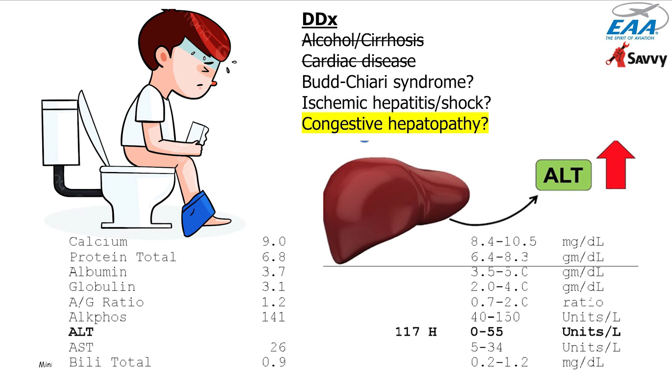And I started my presentation to the docs telling them that I had recently had a lesson in plumbing, and it happened to be my plumbing. I had a couple of nasty bouts of diarrhea, TMI I know, but I went to my primary care doc and said, "Hey, doc, this is sort of unusual for me. I wonder if we should follow up on it and see if we can figure out what's going on." She's a very good internist. She had me do some blood labs. One of the liver enzymes, ALT, was about twice what it should be. Not enough to really worry about, but in an abundance of caution and with my encouragement, because I'm a data-driven person, she gave me a prescription for an abdominal ultrasound.

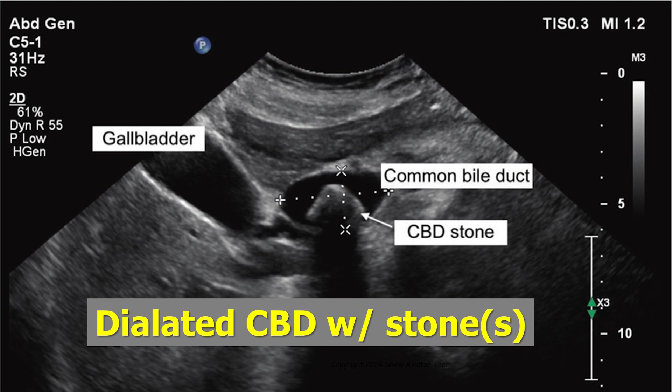When they did the abdominal ultrasound, the good news was that the liver was unremarkable and the pancreas was unremarkable. But they did notice that my common bile duct was dilated. It was larger than it should be, which frequently means that there's something stuck in there. They saw something that might be a gallstone that had migrated into the common bile duct and gotten stuck. So they recommended an MRI, and it was about a month and a half before I could get on the schedule. When I went in for the MRI, they saw very clearly two large gallstones lodged in my common bile duct, kind of blocking the path for the liver to put bile into my digestive system.

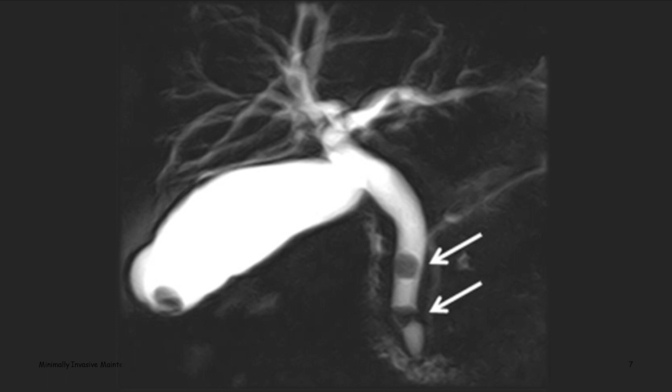I found this out on a Monday at an office visit with the gastroenterologist, and they said there's a procedure we would like to do, and we'd like to schedule you for the day after tomorrow. And I said, oh my God, is it that serious? And they said, no, it's not really that serious. It's just that there's only one guy in the county qualified to do this procedure, and he's just turned in his letter of resignation. He's going down to Santa Barbara at the end of the month. So unless you want to go to Santa Barbara, we need to get you on the schedule right away. So I agreed. I spent the next day Googling the procedure and learning all I could about it. The procedure is called an endoscopic retrograde cholangiopancreatography.

I'll say that, which is kind of a mouthful, so they always call it an ERCP. And it's basically a procedure where they stick a very specialized borescope in your mouth and down your esophagus and down through the stomach and work it through the pyloric valve at the bottom of the stomach and the top of the intestinal tract. And it's a side-facing borescope, so it's got a 90-degree viewing angle,

and they work it down until they find this little sphincter where the common bile duct, which is a duct that connects both the liver and the pancreas and the gallbladder all into the digestive system. So they find this thing, and this is not just a plain ordinary old endoscope or borescope. It has a channel in there where you can insert all sorts of tools. So it's not just something that's used for viewing.

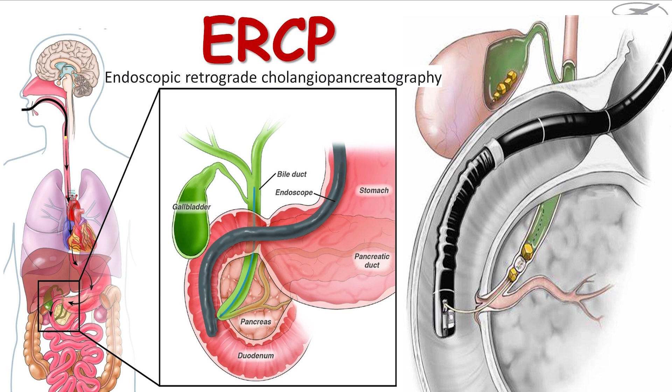It's something that can be used to do sort of surgical procedures, including removing these stones that were lodged in my common bile duct. So this endoscope has more tools than a Swiss Army knife. There's guide wires, there's probes, there's baskets and snares and inflatable balloons and all sorts of stuff that you can run down the channel of this scope and use to do things that would normally require surgical intervention.

I learned, by the way, the difference between an endoscope and a laparoscope, because I would have guessed that this would have been a laparoscopic procedure. A laparoscope is something that is inserted through a hole that the surgeon makes in you, and an endoscope is something that is inserted through a hole that God put there. It's called a natural orifice.

So this was an endoscope that went into a natural orifice and had all these neat tools, and the surgeon was able to remove both of those stones from the bile duct, and it was a somewhat complicated procedure, but it only took about 15 minutes. And I thought it was incredibly cool that they could do it that way, and that they were able to do this in such a minimally invasive fashion without cutting any holes in me.

Basically, I was there for a couple hours, went home, had a very slight sore throat because the stuff had been run down my throat, but the sore throat cleared up within a couple hours, and it was a very cool procedure. But even cooler is another thing that I haven't had done to me, but I learned about.

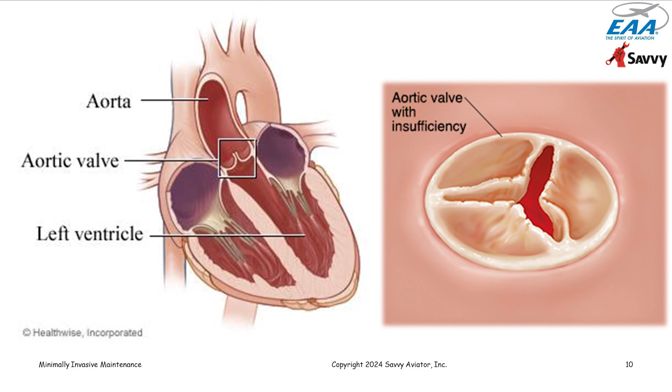This was an open heart procedure where they had to crack her chest, hook her up to a heart-lung machine, stop her heart, and go in there and do this big surgical intervention. Things don't get much more invasive than this procedure. This is worse than pulling a cylinder. It's pretty much like splitting the case.

And they put a porcine valve, a valve harvested from a pig's heart, in there, and sutured it in and put her all back together. She had a fairly long and painful recovery period, a couple months of recovery, but after she recovered from it, she was pretty much good as new and had very good heart function. So it was very successful, but it was also extremely invasive. Well, it turns out that nowadays they don't do it this way anymore, or very seldom do they do it this way.

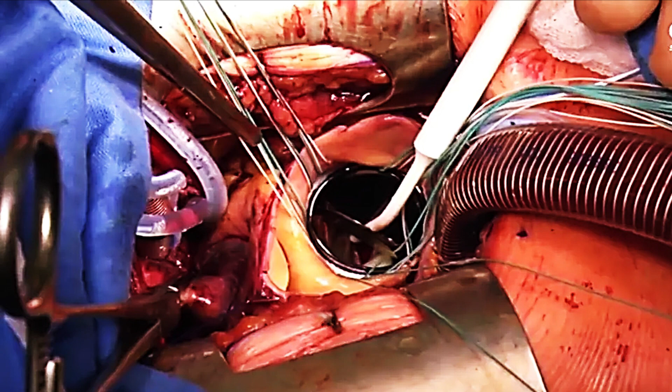Stenotic aortic valves are now replaced in a very non-invasive fashion, something called TAVR, transcatheter aortic valve replacement. This is a procedure that is so unbelievable to me. It's just absolutely remarkable.

Somebody invented an artificial aortic valve that can be folded up in such a tiny package that it can be inserted through an artery. Typically they go in through the femoral artery. They make a little hole near the groin area, and they run this thing up.

The procedure involves first running a balloon through the catheter and expanding the old bad valve so it's wide open, and then running this artificial valve, all folded up tiny, up through the artery, putting it in place, and inflating a balloon to expand it into place.

This artificial valve is sewn to a stent, which is expanded and grabs the side of the vessel and holds on. It's a little hard to do this when the heart is fully pumping, so they use some electrical stimulation to cause the heart to go into tachycardia, which makes it not pump very efficiently while they're doing this, but they don't stop the heart.

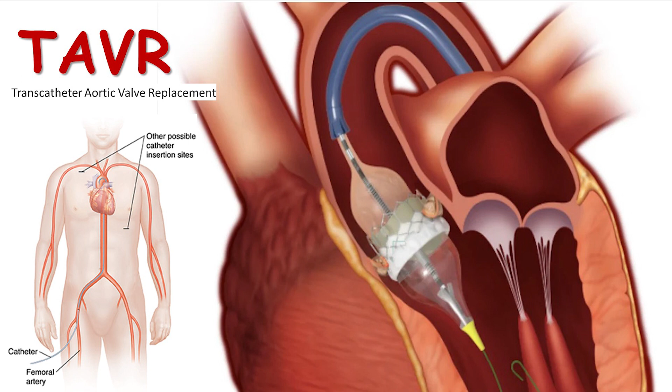This is done just through a tiny incision in the groin, and it's extremely non-invasive, and it's absolutely remarkable that they can do it that way. In fact, it's hard for me to imagine who it was that had such an outside the box thought that they thought, hey, maybe we could do it this way, because it just seems so outlandish that they're able to do it.

It was an experimental procedure for many years. Now it's pretty much the standard of care for aortic valve insufficiency, unless there's some other structural problem with the heart that needs to be repaired, some comorbidity. This is the way it's typically done now, and it's quick and easy, and the recovery is essentially zero. You're out of the hospital the next day, and it's just amazing.

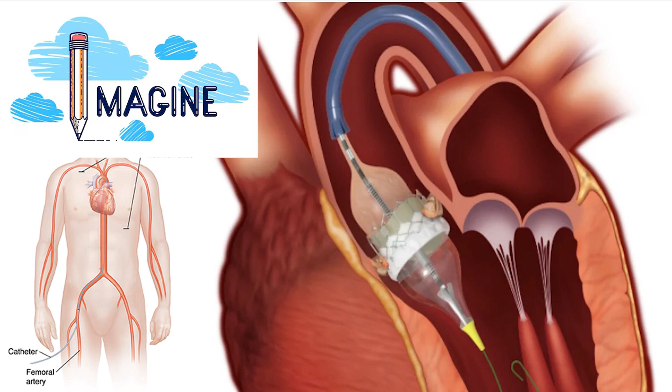So this got me thinking, well gee, if they can do this, what could we do when we're working on airplanes? I had this thought while I was in the shower one day about, well, wouldn't it be cool if we could replace exhaust valves this way? We come up with a procedure called retrograde transguide exhaust valve replacement, where an exhaust valve could fold up and be inserted from the outside of the cylinder and then expanded inside, and we wouldn't have to take the cylinder off to replace an exhaust valve.

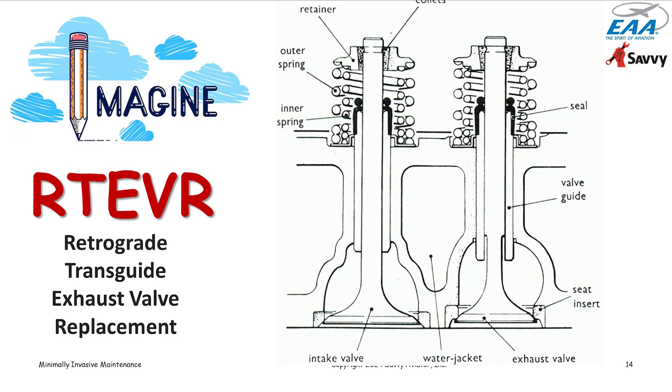Well, nobody's working on that as far as I know, but it was just an interesting thought. We're so far behind medicine in this area of being minimally invasive, but I think it's really important for mechanics to have a minimally invasive mindset and to try to use the least invasive possible methods to solve problems.

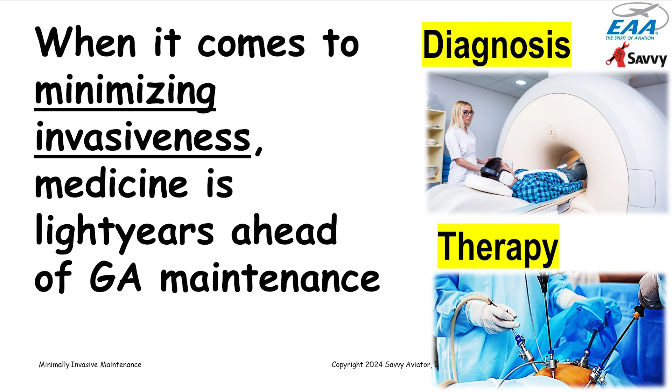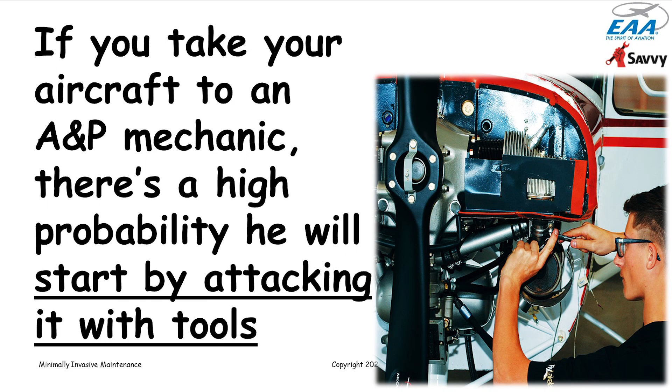And that's not typically the way mechanics are trained. If you take your airplane to an A&P mechanic, the chances are it won't be 5 minutes before he's attacking the aircraft with tools and taking stuff apart, because that's what mechanics do. There's the old expression, I think Maslow's expression, that if all you have is a hammer, everything looks like a nail.

What kind of tools do mechanics typically have? They have compression testers, and they have cylinder base wrenches and stuff, and they're just kind of trained to be in the business of taking stuff apart.

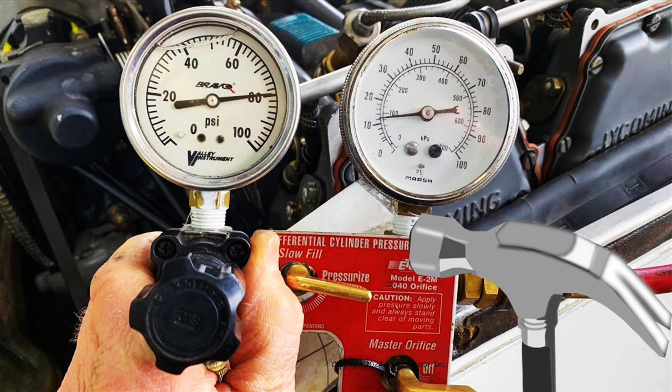How does your A&P assess cylinder health at the annual inspection? Well, 99% of the time he uses something like this, the differential compression tester. In fact, the way most mechanics were taught, and this is slowly changing, there was a kind of simple rule.

When you did an annual, you used the compression tester on all the cylinders, and any cylinder that was less than 60 over 80 needed to be removed for repair or replacement. If it was 60 over 80 or better, you could declare it airworthy and leave it there. And so there tends to be a lot of cylinder removal.

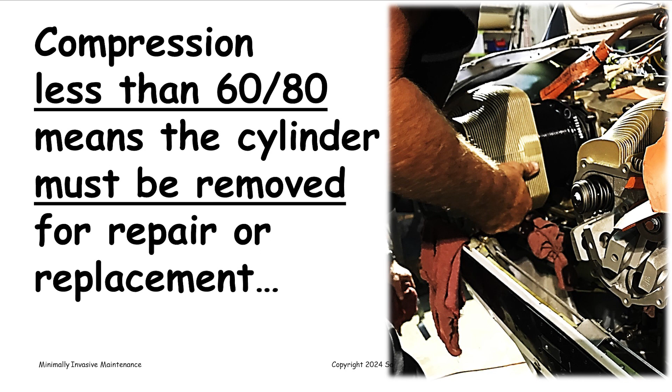Most mechanics aren't really aware of this because they aren't trained on it, but cylinder removal is very risky business. I've actually done a couple of webinars that are in the archive about why I don't like removing cylinders and all of the risks involved.

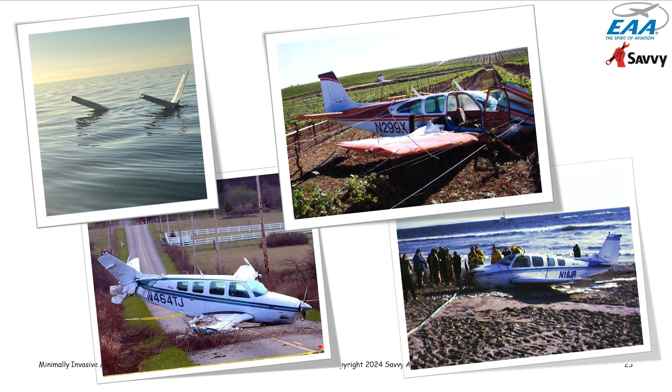I think I've had more exposure to this problem than most people, because I do air crash litigation expert witness work frequently as a defense expert, and I've been involved in just a lot of cases. These are 4 of them, where a mechanic did cylinder removal on an aircraft, and then shortly thereafter the aircraft had a catastrophic engine failure and crashed.

Sometimes, like the one on the bottom right, which happened in Santa Monica some years ago, 2 people died. The one on the upper right happened up near Salinas, California. It involved very serious injury to both occupants. One of the occupants had permanently impairing traumatic brain injury from this crash.

Sometimes the outcomes aren't that bad. The one on the lower left, everybody walked away with only a few scratches, and the one on the upper left, which happened most recently, only last year, the airplane had a catastrophic engine failure shortly after takeoff in Florida, the flight right after some cylinder work was done, and wound up going into the ocean.

Pilot did an excellent job at ditching. This was a Part 135 flight. Passengers in the back got out basically uninjured. The pilot had some minor injuries and spent a couple of days in the hospital, but sure could have been a lot worse.

But at any rate, I've been on a campaign for a long time to say, hey, we don't always need to remove cylinders to solve problems. But that's kind of the standard of care that mechanics have traditionally been taught.

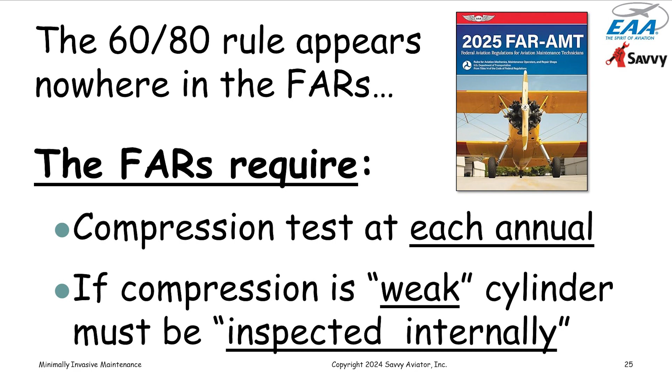But it doesn't define what weak means, and it doesn't define what inspected internally means. So some years ago, I asked the FAA lawyers to send a letter requesting an interpretation of whether you could satisfy the requirement to inspect internally a cylinder with weak compression by doing a borescope inspection rather than pulling the cylinder off. And the letter I got back said that yes, the borescope inspection would meet the regulatory requirement to inspect cylinders for improper internal condition and tolerances.

So that says you don't have to remove the cylinder to satisfy the internal inspection requirement. And that kind of leaves the question, well, what does weak compression mean? Because the reg doesn't say, it just uses the word weak compression. It doesn't define it anywhere. So if you look for guidance on what weak compression means, you can find it in various places, and they say various different things.

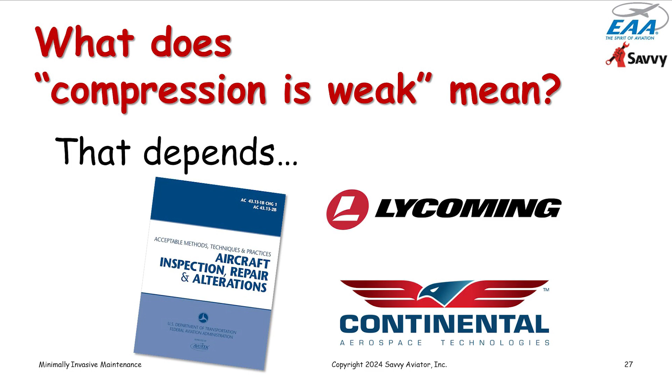It turns out that the old traditional 60/80 rule, the only place that I could find it written down that says under 60/80 the cylinder has to come off, is in Advisory Circular AC 43.13-1B, kind of the mechanics bible, acceptable methods, techniques, and practices, the big giant advisory circular that's the size of a small telephone directory. And what that advisory circular says is this.

It says a loss in excess of 25% of the input air pressure, so that would be 60/80, is cause to suspect the cylinder of being defective. However, recheck the readings after operating the engine for at least 3 minutes. And then they say if it's still less than 60/80 on the recheck, then the cylinder needs to come off. That's what it says in the advisory circular.

Now, of course, the advisory circular is only an advisory circular. It's not regulatory. But one of the things about AC 43.13 is on the very first page, it says basically, don't use the guidance in this advisory circular if the manufacturer gives you guidance that's contrary. In other words, manufacturer's guidance always takes precedence. The AC 43.13-1B is only to be used when there is no manufacturer's guidance.

So it turns out that both Lycoming and Continental do have guidance about compression tests. Lycoming's guidance is in their Service Instruction 1191A, and what it says there is, if the pressure reading, meaning on the compression tester, is below 60 psi, removal and overhaul of the cylinders should be considered. It doesn't say required, it says should be considered. So that actually gives the IA an awful lot of wiggle room.

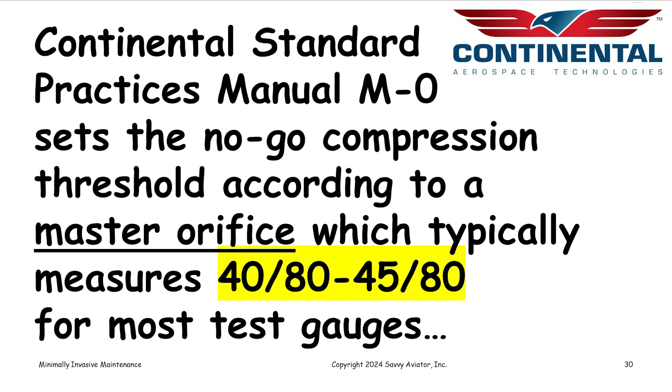So they set the threshold way lower than 60. This guidance also says that anytime you do a compression test — and of course the FAA requires a compression test at every annual and every 100-hour inspection — Continental says you also have to do a bore scope inspection. They use the word 'required' about nine times in this guidance.

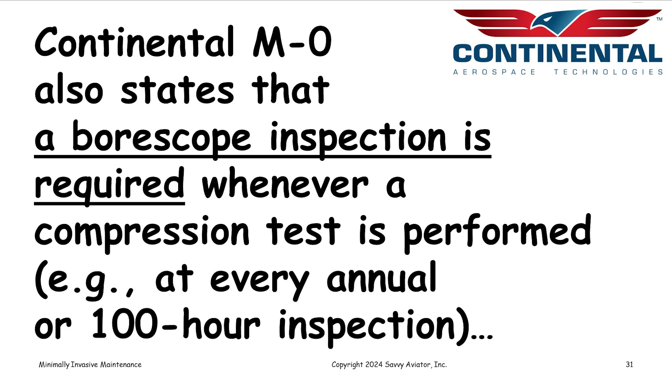So they're really quite serious about doing a bore scope inspection. And then they say, if the cylinder flunks the compression test, meaning it's under that 40-ish master orifice threshold, but it still looks okay under the bore scope, then the engine should be flown for at least 45 minutes, and the compression test should be repeated.

Now, let me ask you, how many shops do you suppose, if they get a low compression reading on a Continental engine, actually go ahead and put all the spark plugs back, button up the engine, and tell the owner to go fly the airplane for at least 45 minutes and bring it back? That almost never happens. But it's actually very good guidance.

We once had a client with a Cirrus SR22 that was in for an annual down in Florida someplace. The shop did a compression test and this cylinder came up at 38 over 80, which was below the master orifice threshold, and the shop wanted to pull the cylinder. We said no — we wanted them to follow the service bulletin. So they did a bore scope inspection, and there didn't seem to be anything wrong with the cylinder. It looked just fine on the bore scope. So we convinced the shop to put the airplane back together and let the owner go fly it.

The owner flew it for an hour and brought it back. They rechecked the cylinder, and this time, instead of being 38 over 80, the cylinder was 72 over 80. So it's actually pretty good guidance, but very, very seldom would a shop actually follow it — it's just too inconvenient for them to put the airplane all back together to do this.

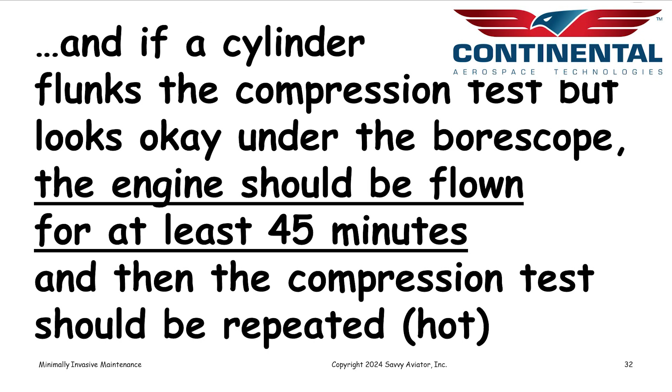Interestingly enough, although Continental requires, or says a bore scope inspection is always required whenever you do a compression test, it doesn't give any guidance on how to do a bore scope inspection. In fact, there's no place we were able to find any guidance on how to do a bore scope inspection of a cylinder — not in any maintenance manuals, not in any service bulletins, not in any FAA advisory circulars, absolutely nothing. You'd think if Continental was going to require a bore scope inspection, they'd tell you how to do it, because they go into great chapter and verse about how to do a compression test, but they don't say anything about how to do a bore scope inspection.

What images to capture, what anomalies to look for, and any of that stuff.

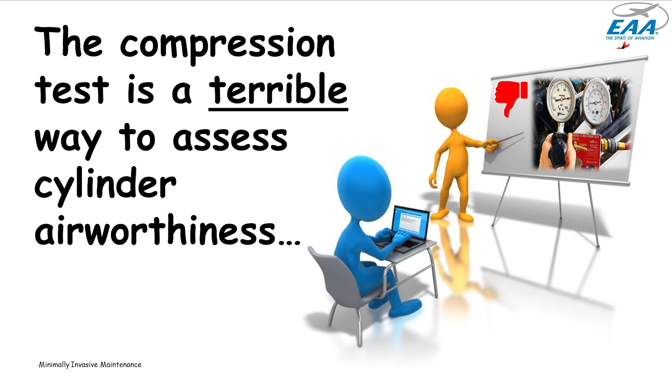So anyway, it turns out that the compression test is a terrible way to assess cylinder airworthiness. There's two big problems with the compression test. The first is it's unreliable. If you test the same cylinder multiple times, you can get wildly different results.

The guy in Florida, it was 38 over 80. He flew it for an hour. Now it's 72 over 80. And nobody really believes that the cylinder got really, really sick and then magically healed itself in that hour. It's just that the compression test is so unreliable.

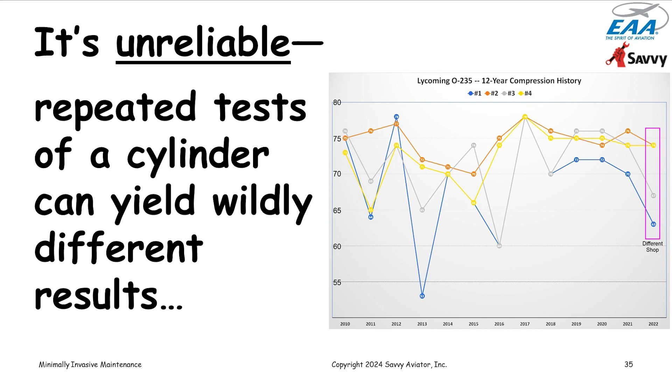And the other problem is that, even if it was reliable, the compression test is not a valid test of cylinder health. It doesn't measure what it purports to measure, which is whether the cylinder is healthy or not. Perfectly healthy cylinders can exhibit very poor compression, and sick cylinders can exhibit really good compression.

And I don't have a slide for this because it's so new, but I actually ran into this just in the last couple of days with my own annual inspection. I had just flown the airplane on two fairly long trips, 20-hour trips, one from California to Houston and back, where I went to visit the Shell Technology Center, and then another one to Huntsville and back, where I went to the Flying Physicians meeting.

And I'd put a lot of time on the airplane, and it was running like a top. It's just perfect, and the engine monitor data looked perfect and everything. So when I did the compression test last week, I kind of expected all the cylinders were going to be fine. And all of a sudden, I ran into, I guess it was cylinder number 6 or something on the right engine that was measuring 20 over 80. 20 over 80. Oh my God, how can that be? This engine's running perfectly.

So I won't get into all of it, but basically I converted the 20 over 80 compression test with a little work into a 70 over 80 compression test without pulling the cylinder off. But 99% of the time, if you put an airplane in the shop with a cylinder that was 20 over 80, that cylinder would come off in the next 15 minutes. And we need to kind of stop thinking that way, because it isn't always necessary.

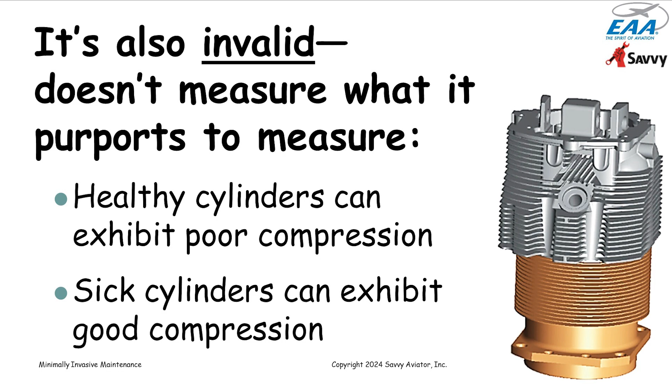But at any rate, even though Continental doesn't say how to do a borescope inspection, a good borescope inspection is a vastly more reliable way to assess cylinder health. Unfortunately, very few A&Ps know how to perform one, because there isn't any guidance from the manufacturer, and they don't teach this in A&P school, and it's really a shame. It's got to change.

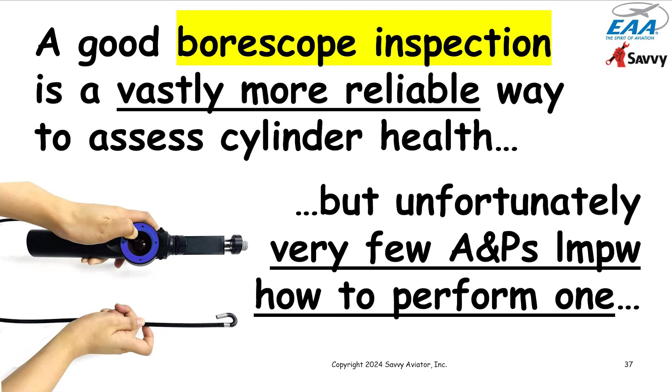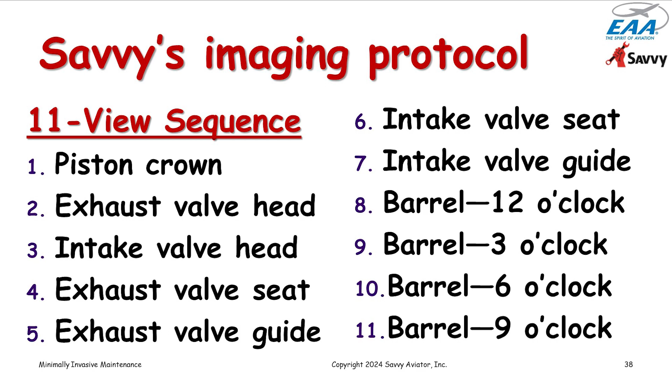So as I mentioned, I actually did a webinar on this. Savvy launched a borescope initiative the first of this year, and among other things, we came up with a specific imaging protocol saying exactly what views we want taken with a borescope for cylinder inspection, and we identified 11 specific views, or shots, if you will, to take when the borescope is inside the cylinder. And we did a 35-minute video that's on YouTube demonstrating exactly how to do this. Dave Pasquale actually did the 11 views on a cylinder and talked his way through it, and it's all captured on video to teach people how to do it this way.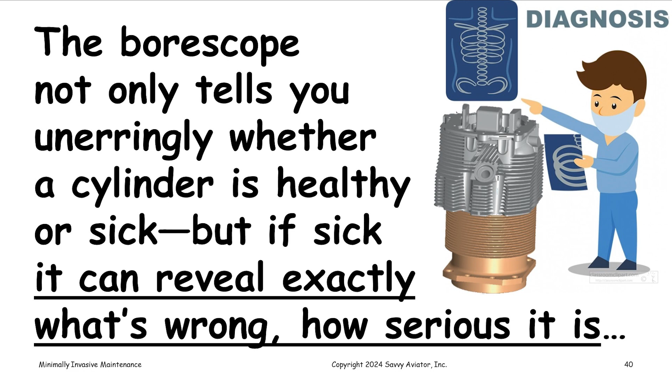And the cool thing about the borescope is it not only tells you whether a cylinder is healthy or sick, and it's very reliable, much more reliable than the compression tester, but if it's sick, it tells you exactly what's wrong, and it tells you how serious it is. And how serious it is is really important, because if it's not too serious, then there's a really good chance that the problem can be resolved without removing the cylinder. And in our experience, at least 50% of the time, when a cylinder is exhibiting weak compression, that problem can be resolved without pulling the cylinder off.

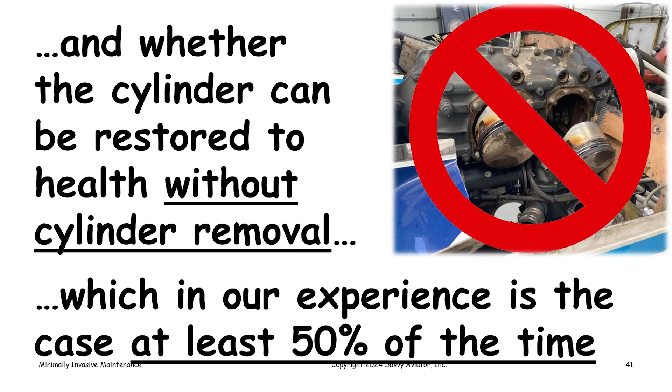And we think we need to start training mechanics to stop having this knee-jerk reaction that weak compression means the cylinder has to come off. We don't want to do open heart surgery if we can use an endoscope or something like that. If we catch problems early, and the best way to catch problems early is to do regular borescope inspections, we can usually solve them without pulling the cylinder off.

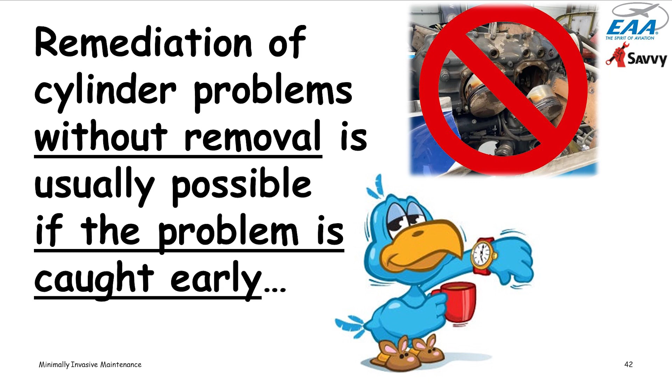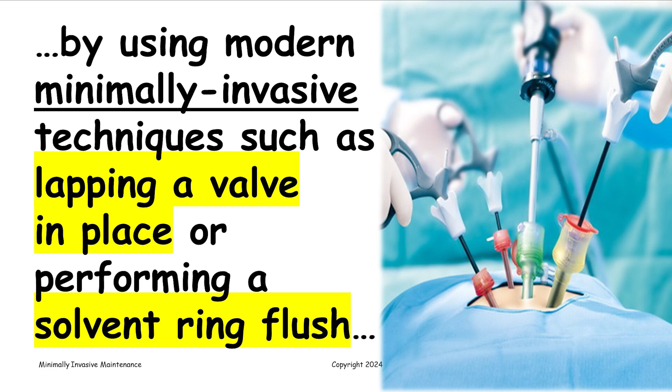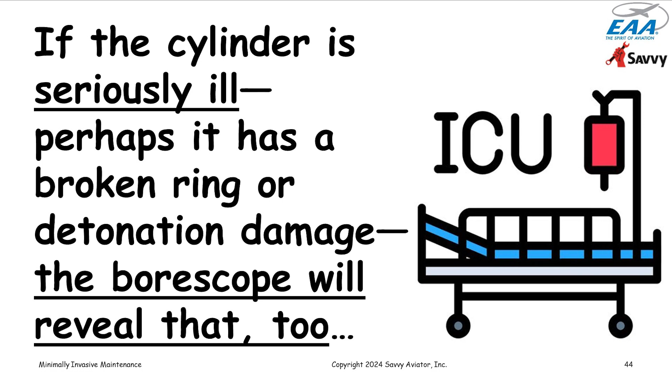If we wait until a problem gets really, really bad, then there may be no alternative but to pull a cylinder off. But if we catch the problems early, we can usually resolve the problem through minimally invasive procedures like lapping the valves in place if it's a problem with a leaky valve, or performing a solvent ring flush if it's a problem with leakage past the rings. And if the cylinder is seriously ill, maybe it has a broken ring or detonation damage, you can see that very clearly in the borescope inspection as well. And obviously, if you see something like that, then the cylinder is going to have to come off.

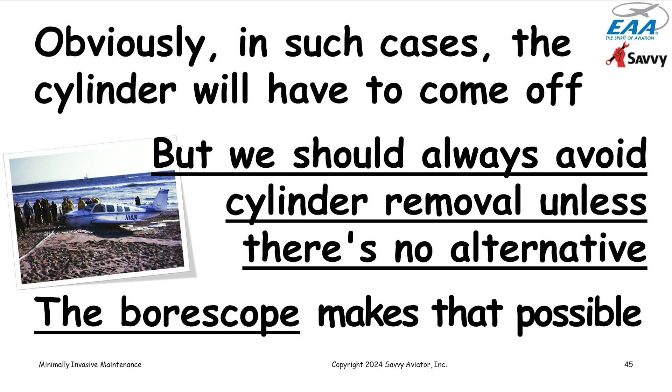But we should always try to avoid cylinder removal unless there's no alternative. And the borescope gives us the information we need to make that decision in an educated way. So the two minimally invasive procedures that we have been trying to get mechanics to use in cases of cylinder problems that are not terribly severe are lapping the valves in place and the solvent ring flush.

And lapping the valve in place is the most common thing that we do, because leakage past the exhaust valve is the most common reason for weak compression. With the borescope, we can get a really good idea of why the valve's leaking, what its condition is, and whether it's something that is going to require the valve to actually be replaced, which can happen if the problem is very advanced. But if we catch it early enough, we can solve it simply by lapping the valve in place. The borescope will give us a really good idea whether the valve's a good candidate for this or not.

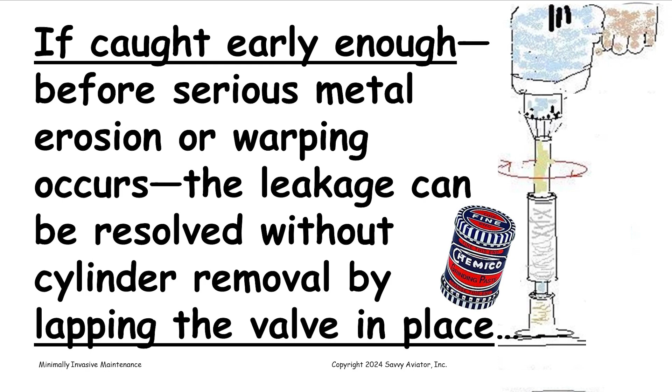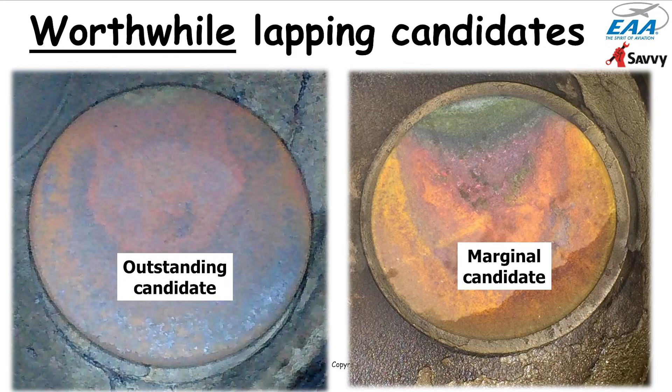But valves like this, the one on the left, is pretty much what my 20/80 cylinder looked like. It clearly had an asymmetric pattern to it, but it was an early stage of burning. The one on the right is kind of a marginal candidate. Lapping might fix it or might not. But in cases like that, it's always worth trying to lap the valve. And if you're not successful, you always have the option of pulling the cylinder later. It always, to me, makes sense in a borderline case to try the minimally invasive procedure first before resorting to something more invasive.

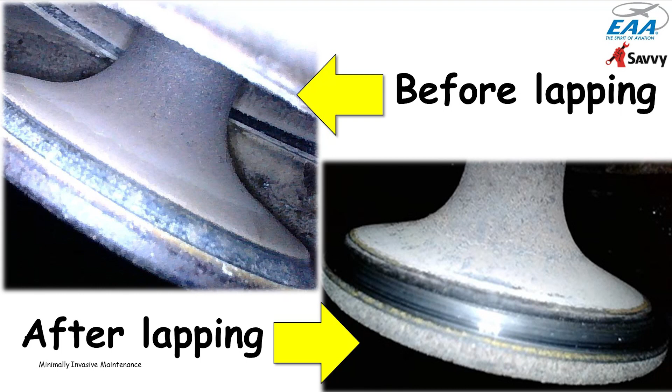And we look at the head of the valve like this. We get a sort of heat signature that gives us a pretty good idea what's going on. But even more revealing, and something that not too many mechanics have been trained to do, is to get views like this of the valve, where we open the valve and we work the borescope in so that we're getting a nice side view of the valve and of the seat. Because at the end of the day, what's really important are the contact surfaces between the valve and the seat. That's what's going to determine whether the valve is sealing properly or not.

And what we would like to see is contact surfaces like that photo in the lower right, where there's a nice shiny contact surface indicating really good contact with the seat, and that contact signature is fairly even in width all the way around the circumference of the valve.

The one on the upper left, the contact surface has gotten kind of rough due to a phenomenon called microwelding, which causes a little metal transfer between the seat and the valve, and there's some deposits and stuff, and a little lapping can clean that right up and have a huge impact on what the compression reading is going to be. And there's just no reason in the world to be pulling a cylinder off just to solve a problem like that.

Anytime we lap a valve, part of the procedure is we have to pull the valve springs off to free up the valve so that we can rotate it. And so if it's an exhaust valve, we're taking off the rotocoil or the rotator cap. Continental calls it a rotocoil. Lycoming calls it a rotator cap. They look different, but both of them, their function is to cause the valve to rotate slightly every time it opens and closes. And these things have a tendency to go bad after a while.

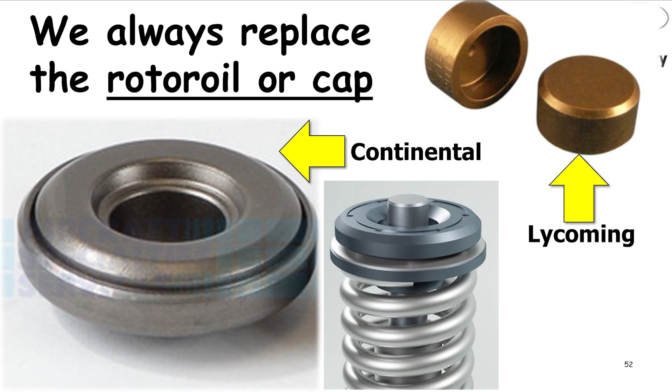He decided that this was a good candidate for lapping. I agree. He lapped the valve in place. He replaced the rotocoil and went and flew the airplane. Normally, I fly it for 15 hours before I go back and take another look, but he was impatient. So he flew the airplane for 1.7 hours, and his curiosity got the better of him.

He pulled the spark plug, stuck a borescope in, and the valve looked perfect, and all the signs of the abnormal heat signature had completely disappeared after just 1.7 hours of flight after he lapped the valve and changed the rotocoil. You know, lapping valves is standard operating procedure when cylinders are sent in for repair, but in that case, the lapping is usually done this way.

There's a tool with a suction cup at the end of it that you stick to the head of the valve, and then you put some valve grinding compound on the contact surfaces, and you spin the valve. But of course, if the cylinder is on the airplane, we can't do it this way because this tool would have to be inside the cylinder, and maybe one of these days we'll get a tricky borescope that lets us do this. That's not actually beyond the realm of possibility. But at the moment, we can't do that.

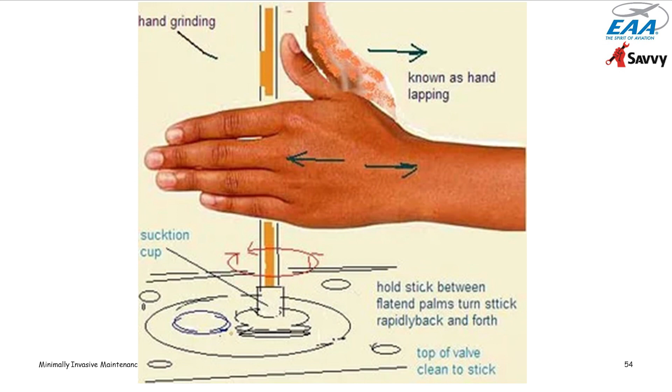So what we have to do is spin the valve from the outside by taking the rocker off, and then the valve springs off. And then we connect the stem of the valve to an electric drill with a flexible coupling. I usually use a piece of 1/2-inch ID automotive brake hose to hook the drill to the valve. And then we figure out some way to put some valve grinding compound in there, and we spin the valve from the outside of the cylinder and lap the valve that way.

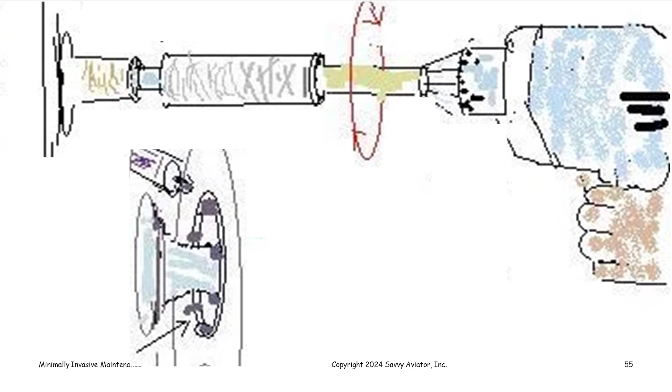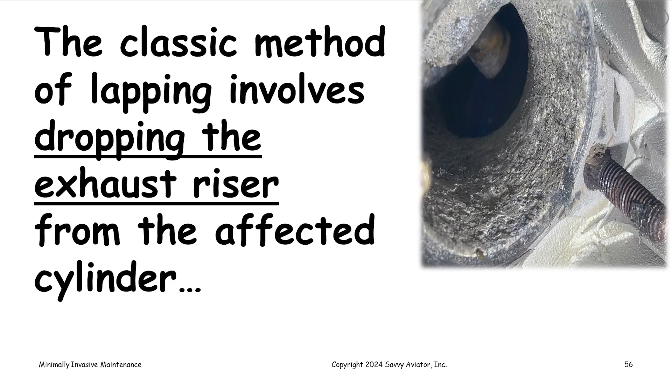The traditional way of doing this, which has been done by mechanics for many years, not enough mechanics, is to drop the exhaust and then have access to the contact surface of the valve through the exhaust port, and insert the valve grinding compound that way through the exhaust port, and then spin the valve.

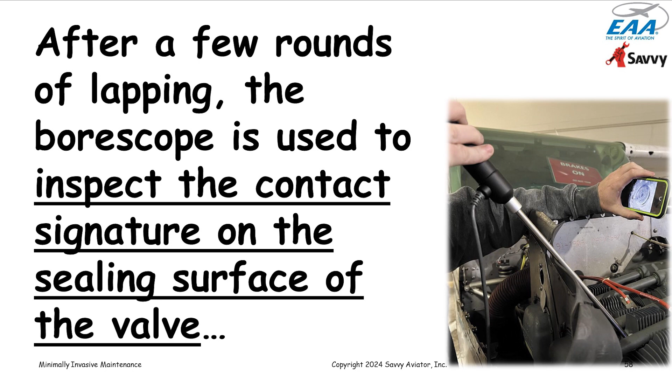You lap it for a while, then you stick a borescope in and inspect what the contact surfaces look like. If you still don't like what you see, you go lap it some more, and you just keep iterating until you're happy with what the contact surfaces look like, and it should be nice and shiny and of constant width and stuff.

Now, some years ago, I ran into a problem with my airplane where I was doing an annual inspection, and I wound up with a cylinder that was measuring a little less than 20 over 80, with air leaking past the exhaust valve. When I put the borescope in, I saw this non-symmetrical heat signature, but it didn't seem like it was very far gone, and it seemed like it would be a good candidate for lapping. So I decided that I would try lapping the valve. I'd never actually done it myself before.

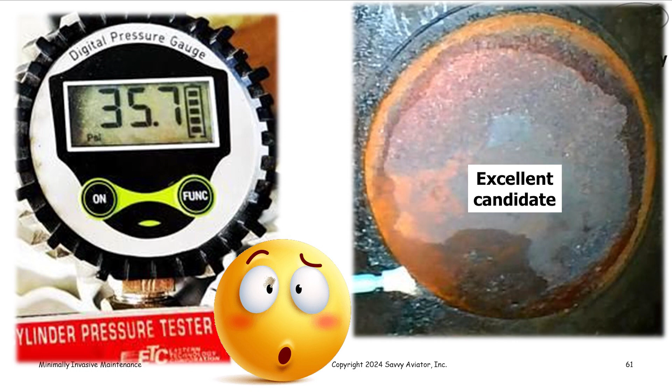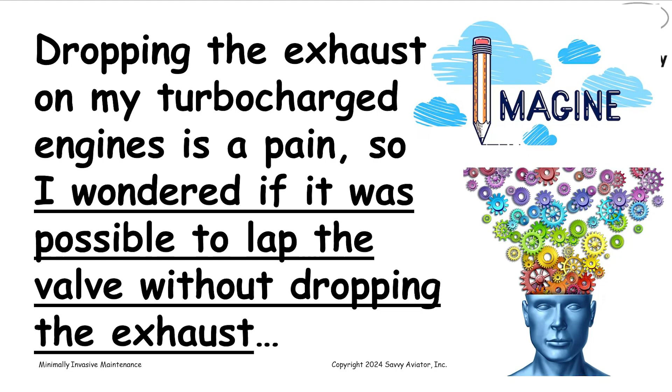The problem is that my engines are turbocharged, and dropping the exhaust is a real pain in the butt. And so I wondered whether there was some way that I could do this without having to drop the exhaust. I thought about it for a while, and came up with a scheme that I thought might work. And it involved buying a pack of 100 gun cleaning swabs off of Amazon.

These are long cleaning swabs, like Q-tips on steroids, but the tip is not cotton. It's kind of a spongy foam, and the shaft is not wood. It's plastic. And so I got these gun cleaning swabs, and I used a heat gun to heat up the shaft and put a 45-degree bend in the shaft.

And after a little experimentation, I got the bend right where I could stick this thing through the lower spark plug hole and work it around to get it between the exhaust valve and the exhaust valve seat. So I could load up the end of this swab with a whole bunch of grinding compound, work it in through the bottom spark plug hole, and through the top spark plug hole I've got a borescope so I can see what I'm doing.

And I'm working through the bottom spark plug hole, and I work the swab to where it's between the valve and the seat. I close the valve against the swab. I spin the valve around to distribute the compound. I do this a couple times, and then I take the swab out and I hook the electric drill up to the valve, and I spin it and lather, rinse, repeat until I get the results that I want.

So this is a super non-invasive way. This is using natural orifices only. Don't have to open anything up. Don't have to take anything apart. All we're doing is taking top and bottom spark plugs out, and that's all the access we need, which is obviously taking the valve springs off as well. But we don't have to drop the exhaust or the intake or take any baffling off or anything like that.

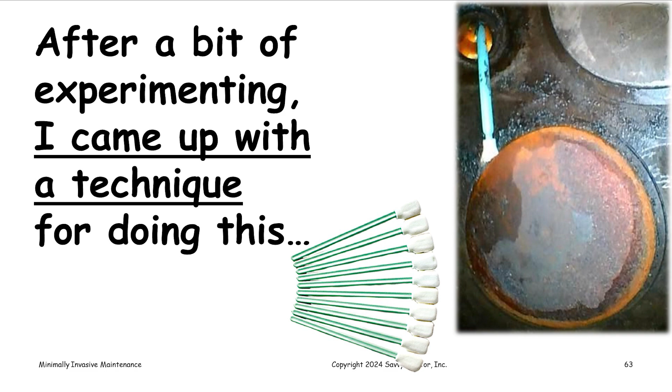It's just a very quick and easy procedure, and I've now done it a bunch of times, but this was the first time I did it. And I was so enthused that you could do it this way without having to drop the exhaust off the engine that I made a video, which is also up on YouTube, showing exactly how I did it.

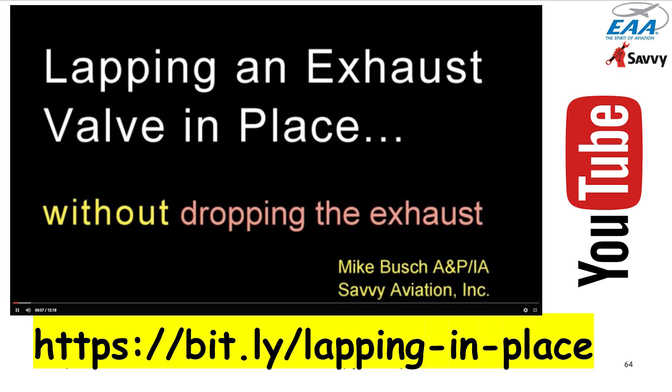But at any rate, my first attempt at lapping, that cylinder went from a little less than 36 over 80 hot to 71 and a half over 80 cold. That was a little over 100 hours ago that I did that. And I just measured that cylinder last week, and it was measuring 76 over 80 hot. So the lapping was successful, and it lasted. So that was good.

But I just lapped a valve last week on a cylinder that measured 20 over 80, and it came up to 70 over 80. And the 70 over 80 was a cold reading, so it's probably better than that hot.

The other procedure that we like to use in the case where we do a compression check and air is escaping past the rings, or where the owner is complaining that oil consumption has gone up and there's a bunch of oil on the belly out the breather, is a solvent ring flush procedure. Because it turns out that an awful lot of the time where we have leakage past the rings there's nothing really wrong with the rings. It's just that they're gunked up.

They're stuck in their grooves because there's a bunch of sludge build up in there, which makes it impossible for the rings to move normally, and that interferes with their ability to seal the combustion chamber. This sludge is kind of nasty stuff. It's heavily laced with lead, and I think when the day comes that we are running on unleaded avgas, this problem will be much less than it is now.

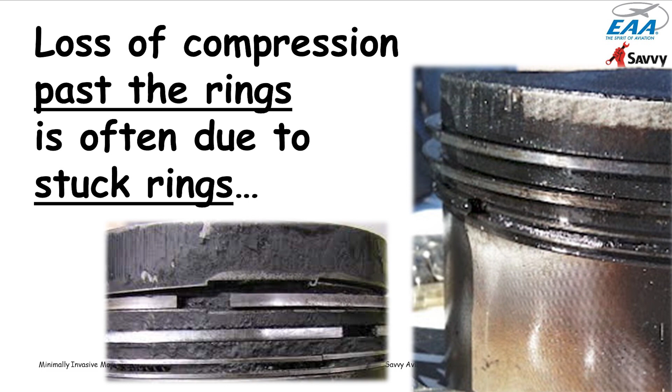But in any case, this lead sludge gets into the ring grooves, it gets into the slotted oil control ring, and it gets into these little feed holes that are drilled in the oil control ring groove to allow oil to pass from the inside of the piston to the oil control ring groove.

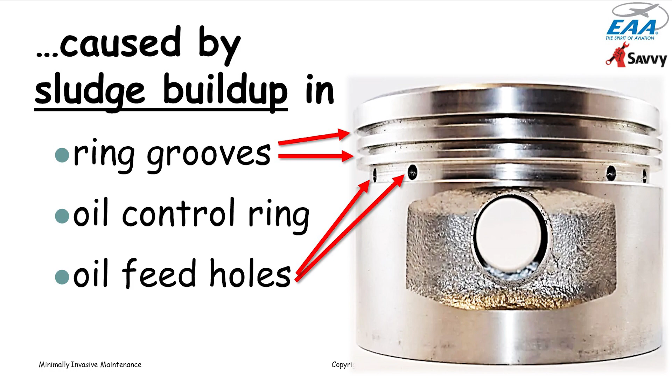The top two grooves are compression rings. The third one down is the oil control ring. And then some pistons have a fourth ring that's way down below the piston pin called a scraper ring, and some only have 3 rings. But in any case, this is where we get sludge buildup. And if the condition is caught early enough, it can be remediated without cylinder removal.

The procedure is really a very simple procedure. In fact, it's so simple that I think arguably an owner could do it as preventive maintenance under the Coleal interpretation, because you usually do it in conjunction with an oil change, and basically consists of treating each cylinder by filling the combustion chamber with a solvent mixture, putting the spark plugs in, and then pulling on the prop to force the solvent mixture past the ring pack into the crankcase, where it'll drain out into a bucket.

And the first time you do this, it usually is quite hard to pull the prop through and force the fluid through. And then you repeat it, and it gets easier and easier. And finally, when it feels nice and free, you declare victory and you go on to the next cylinder. And then when you're all done, you service the engine with fresh oil and stuff. But it's a very easy procedure.

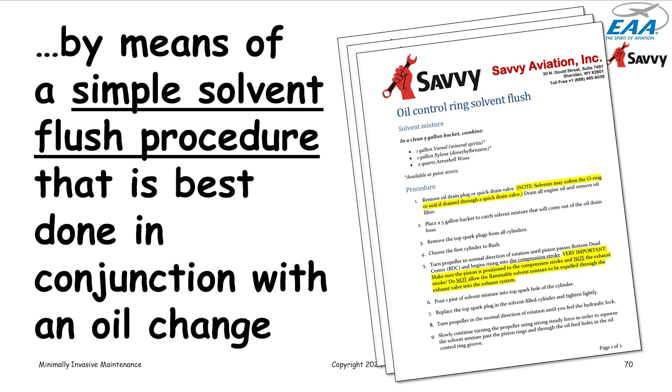Actually, the idea for it came from Ed Kollin, who's the lubrication engineer, used to run the Exxon engine lab, and the inventor of CamGuard, and probably the smartest aviation oil guy that I've ever met. Just a wealth of knowledge.

But he came up with this idea, and I asked him if it was okay for me to write it up in detail so that mechanics had some guidance to follow. And he said, fine, just don't put my name on it. So I didn't. But at any rate, Ed gets the credit for coming up with this idea, and I've sort of perfected the procedure a little bit. And the procedure is available online.

And it's just a 2-page write-up that tells you step by step how to do it, how to mix up the solvent mixture, and how to do the procedure. It's very simple. Like I say, it's something that probably an aircraft owner could do on his own recognizance as preventive maintenance. It's so simple, because all it really requires is taking out the top spark plug and the oil drain plug. So it's about as minimally invasive as you can get, and it works remarkably well.

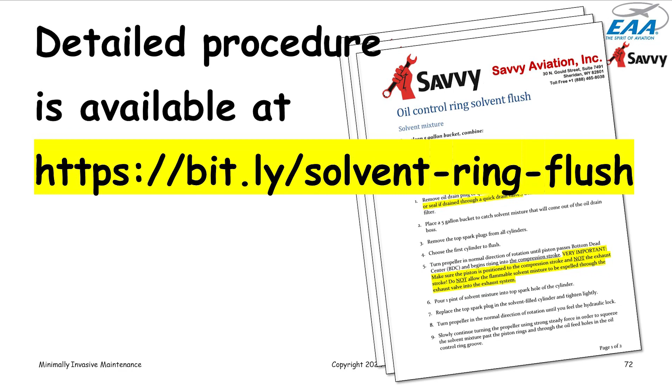Here's one success story I found on a Mooney forum. The guy said one cylinder had very low compression. You could hear air was leaking past the rings. So we tried doing the solvent flush. The cylinder made 75/80 after that. And this is fairly common.

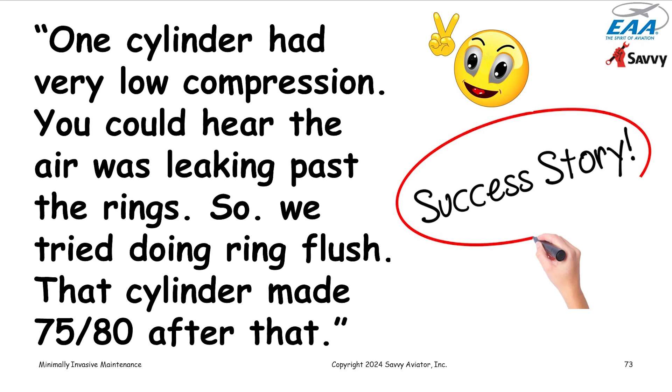Now, and I'll have to be honest, this doesn't always work. If the rings are so badly sludged up, it may be that no matter how hard you pull on the prop, you can't force the fluid past the rings. They're just too badly sludged up.

And it's not uncommon to do this on, say, a 6-cylinder engine, and have 5 of the cylinders get cleaned up with the procedure, and the 6th cylinder just be so stubborn that you can't do it. In which case, what was meant to be a therapeutic procedure becomes a diagnostic procedure. At least you know for sure that your rings are terminally sludged up, and probably the only thing you can do to solve that is to pull the cylinder and clean up the piston mechanically.

But it works a lot more often than it fails. And actually, there's probably a pretty reasonable case to be made for doing this prophylactically, say every 500 hours or so, to keep the ring pack clean and not let it get to the point where you can't clean it out. We definitely have seen some cases where the sludge was so bad that you couldn't get rid of it with a solvent flush, but most of the time the solvent flush is very effective, and it's very easy. Anytime there's a problem with air escaping past the rings, it just would make no sense not to at least try this.

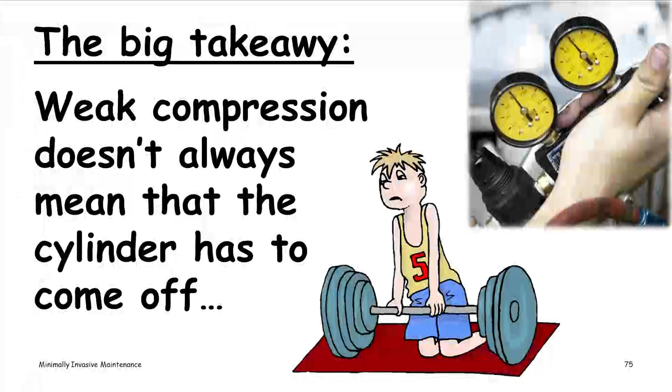And as I said before, you always have the option of pulling the cylinder, but it really doesn't make sense to pull a cylinder without at least trying less invasive techniques first. So the big takeaway here is weak compression doesn't always mean that the cylinder has to come off. What it does mean is that the cylinder needs to be borescoped to determine what's going on.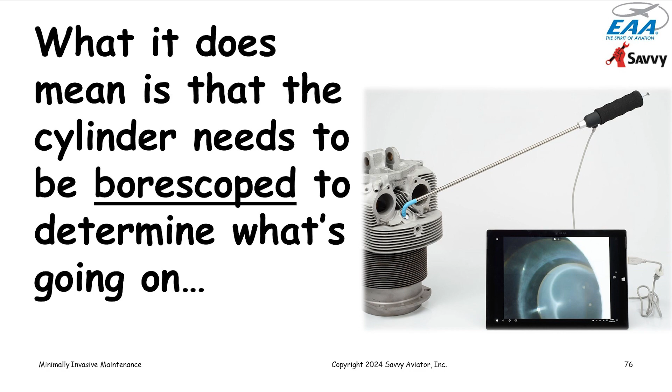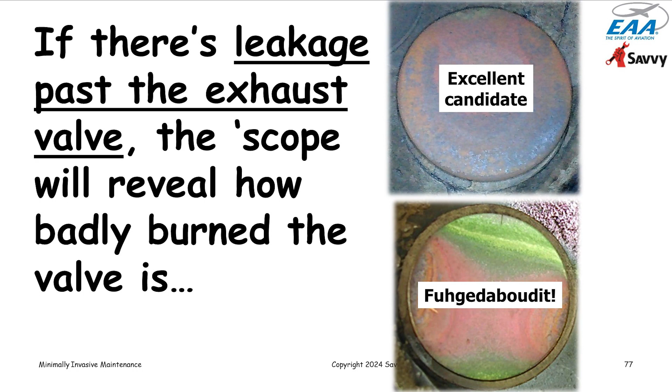And if there's an exhaust leak and it's not at the terminal stage where the valve is physically no good, then there's a very good chance that the problem can be remediated by doing the lapping in place procedure. And if you follow the procedure that I came up with, you don't even have to drop the exhaust. It's just a very simple procedure. This is one that does require an A&P because it requires taking the rocker cover, the rocker arm and the valve springs off, but it doesn't require taking anything else apart.

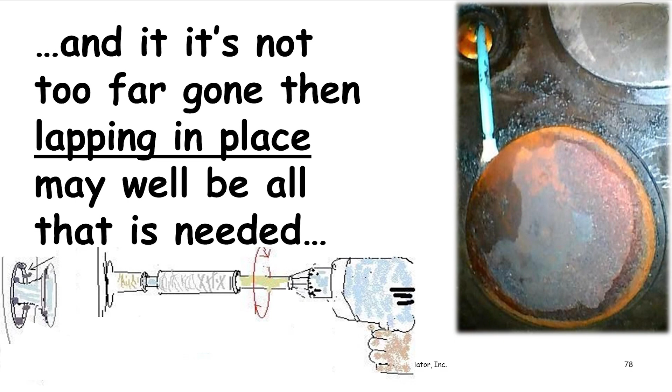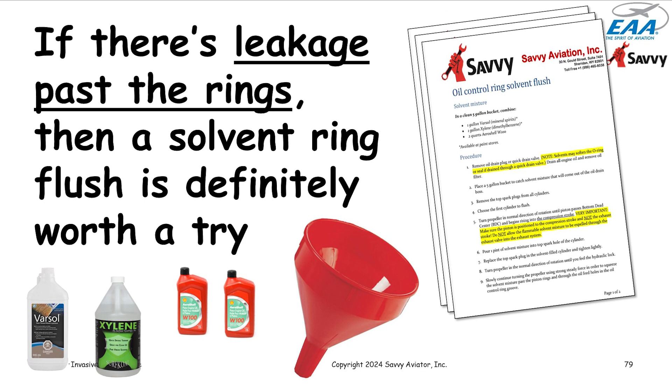And if there's leakage past the rings, the solvent ring flush is so simple that it's definitely worth a try. Most of the time it works, and every so often it doesn't. Frequently it'll work on most of your cylinders, but maybe you'll have one stubborn one that it won't work on. And then you have to decide whether the compression is so low or the oil consumption is so high that you can't live with it, and it's worth taking the cylinder off. But in any case, it'll improve things a lot, and it's probably not a bad idea to consider doing the solvent ring flush every 500 hours or so, just to keep things from getting to that point.

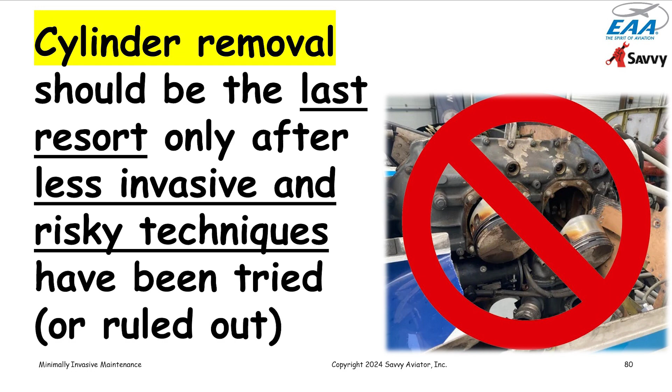So cylinder removal should be treated as a last resort, kind of like open heart surgery, after less invasive and less risky techniques have been tried. You just can't discount the fact that cylinder removal is risky business, and that there have been a lot of catastrophic engine failures that happen shortly after cylinder removal. So sometimes we have to do it, but we don't want to do it anytime we can avoid it. And an awful lot of the time we can avoid it.